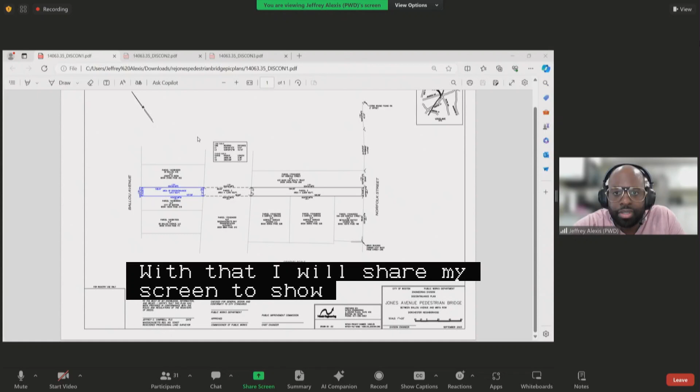Public Works is also in coordination with the Mayor's Department of Housing to transfer parcels that we own, parcels 1 and 3, to them for future development. With that, I will share my screen just to show you all the PIC plans.

Just zooming in quickly, showing these 3 parcels, the areas of discontinuance. This is the first PIC plan. It shows parcel 1, as you see here, which is adjacent to a City of Boston parcel, but this will be also owned by the Public Works, City of Boston.

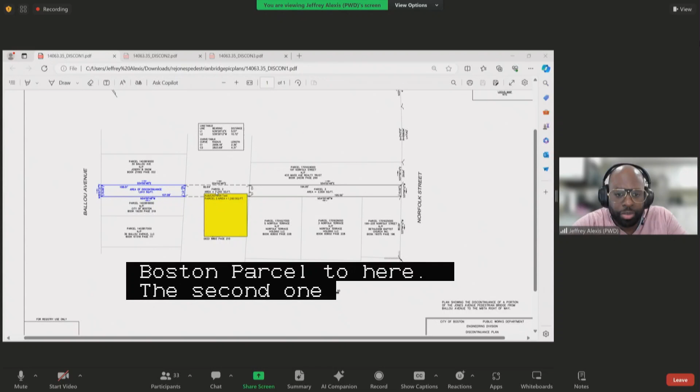Parcel 2 here, which would be owned by the MBTA, and parcel 3 here, which is also owned by Public Works, which these 2 we are proposing to transfer and work and coordinate with the Mayor's Housing Department in order to transfer those parcels to them.

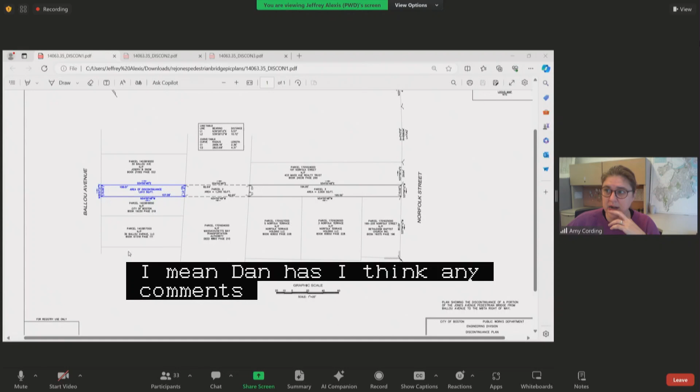With that, I don't know if I would turn it over to my colleague Dan Murphy. I don't know if he has anything to say on this end, but with that, I'll turn it back to you, Chairwoman. Assuming Dan has nothing, any comments or questions by commission members, PIC staff, or public? I will use this opportunity to remind the public, if you wish to ask questions or add testimony, please use the raised hand function at the bottom of your screen. I see none at this time.

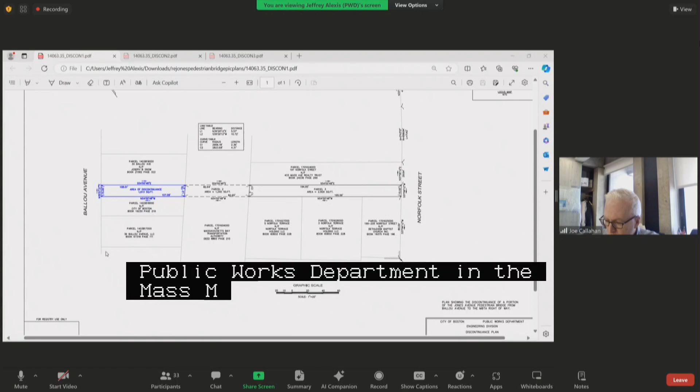I will entertain a motion on public hearing item number 1. I make a motion to approve a joint petition by the City of Boston Public Works Department and the Massachusetts Bay Transportation Authority for the discontinuance of any and all rights to travel the public may have in the area of Jones Avenue Footway, as further read into the record by the chair. Second. All in favor? Aye.

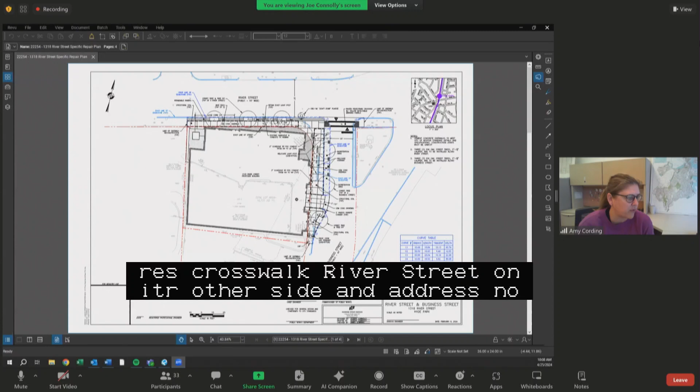Public hearing item number 2 on a petition by HB Trax Realty LLC for the making of specific repairs within the following public ways in Hyde Park, consisting of curb realignment, roadway and sidewalk reconstruction with structural soil, as well as new and relocated pedestrian ramps, specialty pavement, street lighting infrastructure, street trees, green stormwater infrastructure, storm drain infrastructure, bike racks, hydrants, driveway curb cuts, and raised crosswalk. River Street on the southerly side at address number 1318, generally west of Business Street south of River Street. New business 4/11/2024 is shown on a set of plans entitled City of Boston Public Works Department Engineering Division Specific Repair Plan, River Street, Business Street, 1318 River Street, Hyde Park, dated February 8th, 2024.

Good morning, Chairwoman, Chief Staff, thank you for the introduction. Joe Connolly of Howard Stein Hudson, civil engineer for the project, representing HB Trax Realty LLC. I am joined today by James Downing, Ian McKinnon of Howard Stein Hudson, the proponent Bobby Patel, and the project attorney John Porcini as spectators.

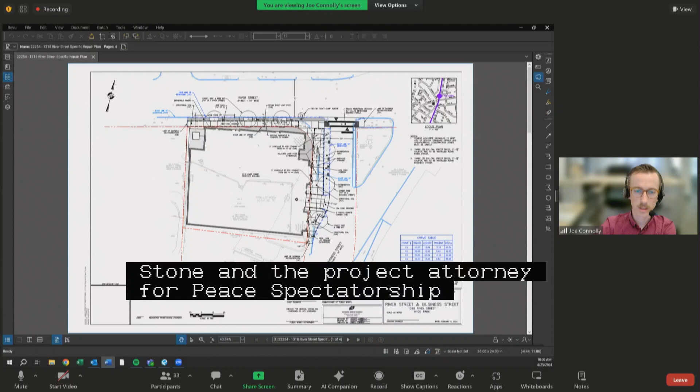We are petitioning for repairs related to our project at 1318 River Street in Boston's Hyde Park neighborhood. There have been no changes made to the plans since we last met for our second distance hearing. All comments were resolved prior to that. I'm happy to run through any of the improvements again or answer any questions. We have recently submitted hard copies of Boston Water and Sewer documents and are currently awaiting our site plan approval.

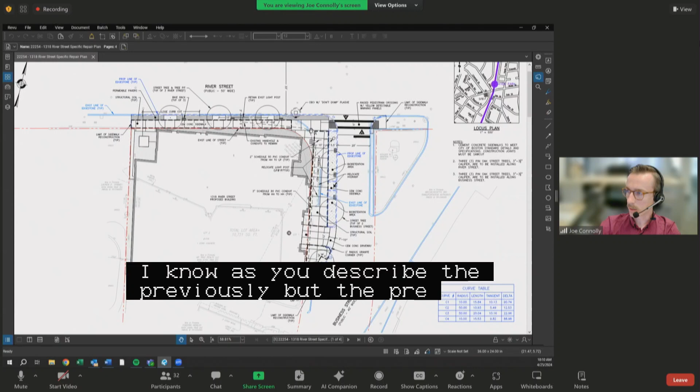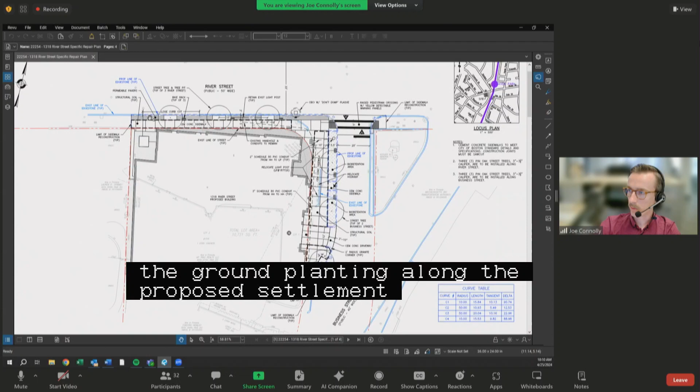I know I've described most of the improvements previously, but just a quick summation. We're closing this curb cut on River Street, closing the curb cut on the corner of River and Business Street, modifying the curb cut on River Street to be used for the garage parking below the proposed development, sidewalk reconstruction along the entire frontage, permeable pavers on River Street, bioretention areas in the furnishing zone along Business Street, three street trees proposed along each frontage, a raised pedestrian crossing across the Business Street intersection, one new street light, as well as one relocated street light.

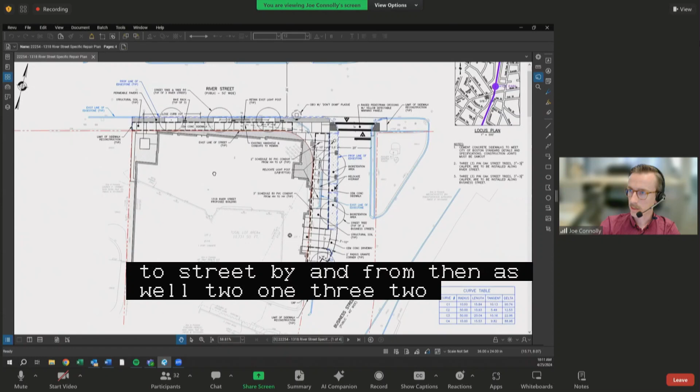I think that just covers it. Does anyone have any questions? Questions or comments by commission members? PIC staff or public? I'm going to pause now to see if anybody from the public would like to add testimony or ask questions. Seeing and hearing none, I think we're all set.

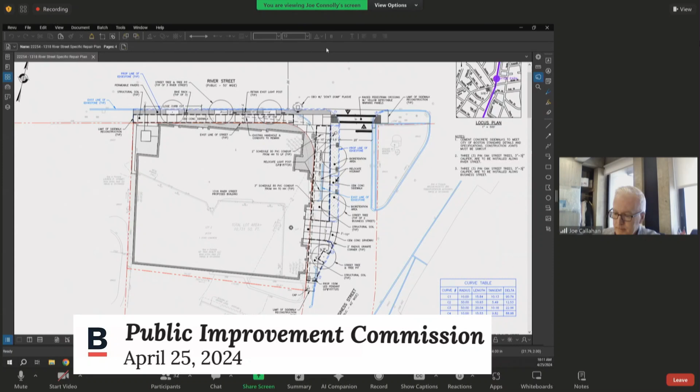All right, I will entertain a motion on public hearing item number 2. I make a motion to approve a petition by HB Trax Realty LLC for the making of specific repairs in the area of River Street and Business Street as further read into the record by the chair. Second. All in favor? Aye. Great, thank you.

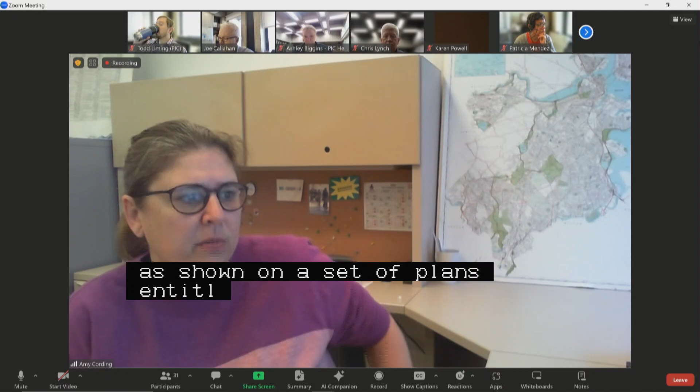On to public hearing item number 3, on a petition by Arnold Arboretum of Harvard University for the making of specific repairs within the following public ways in West Roxbury, consisting of curb and sidewalk reconstruction, as well as new and relocated pedestrian ramps, specialty pavement, street lighting infrastructure, landscaping, storm drain infrastructure, and bollards. Bussey Street generally at Walter Street and South Street, Walter Street generally at Bussey Street, and South Street generally at Bussey Street. New business 4/11/2024 is shown on a set of plans entitled City of Boston Public Works Department Engineering Division Specific Repair Plans, 125 Arborway, Walter Street, and Bussey Street, and South Street to be opened, 4 sheets dated April 2024.

Good morning, Chairwoman and PIC staff. Thank you for hearing us today. My name is Danny Schissler. I serve as Head of Operations and Project Management at the Arnold Arboretum. I'm here on behalf of the Arboretum to present this project, which proposes improvements to two of our historic entrances, one at the intersection of Walter and Bussey Street, and one at the intersection of South and Bussey Street.

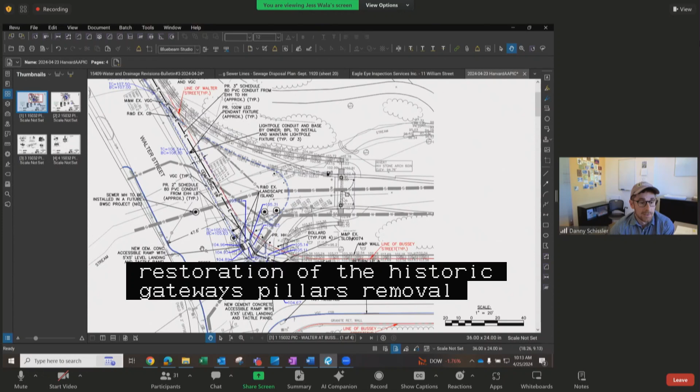The improvements comprise restoration of the historic gateways, pillars, and stone walls, removal of impervious surface and the addition of planting beds, new signage, and hardscape treatment, bollards, and within the right-of-way, reconstruction of sidewalks, pedestrian ramps, the addition of street lighting in collaboration with the Street Lighting Division. Since we last presented, there have not been any changes to the plans besides noting some points regarding reciprocal ramps, for which we are seeking a MAAB variance. If that variance is not received, the Arboretum is committed to reconstructing those ramps.

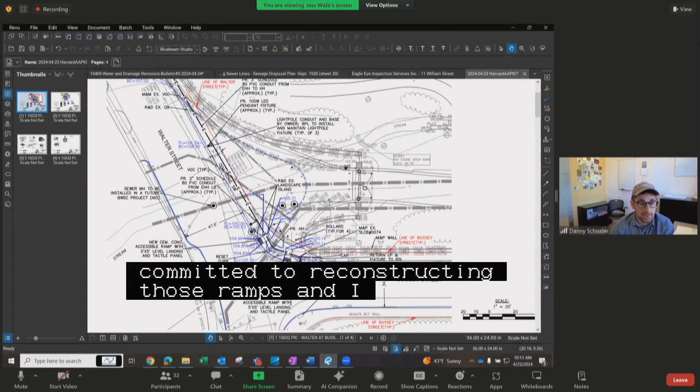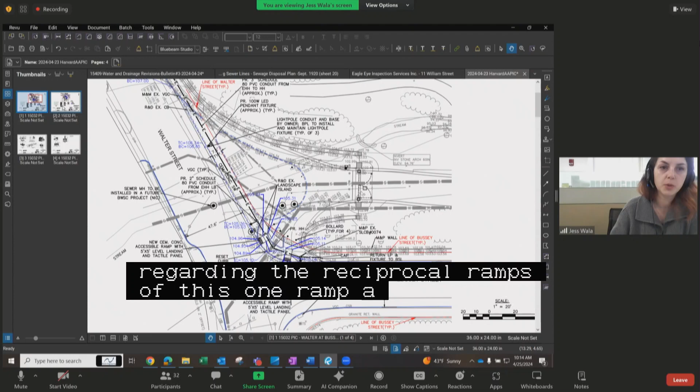And I will turn things over to Jess Wala, Nitsch Engineering, our civil engineer for the project. Thank you, Danny. Thank you, commissioners. So yeah, Danny, you basically summarized everything. We had coordinated all comments previously, and the one outstanding comment was regarding the reciprocal ramp. So this one ramp at Walter across Bussey Street, which had some slightly non-compliant slopes, and then the reciprocal ramp across Bussey Street at Poplar Gate. So the team submitted the variance, I believe last week, and are waiting for the hearing. And if that is not granted, then these, as Dan described, will be reconstructed. All other items, I believe, have been settled. We've coordinated with Boston Water and Sewer, street lighting, and all other agencies. So I think those were the only outstanding comments regarding ramps.

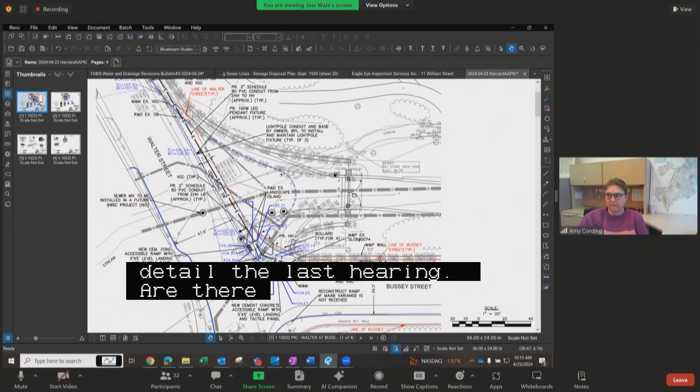Is there anything that I should speak to? I know we went into this pretty detailed at the last hearing. Are there questions or comments by commission members, or anything additional you'd like to see? PIC staff or public? Do you have any idea on the timeline for that variance application?

It was submitted on Friday. Jess or Suran, do you have any sense of when the hearing for that would be? That would be May, I think it's on the May 6th agenda. Great, thank you. Can you just make that decision and update the plans as necessary before submitting Mylar, if that's all right with you? Yep, that makes sense. Thank you.

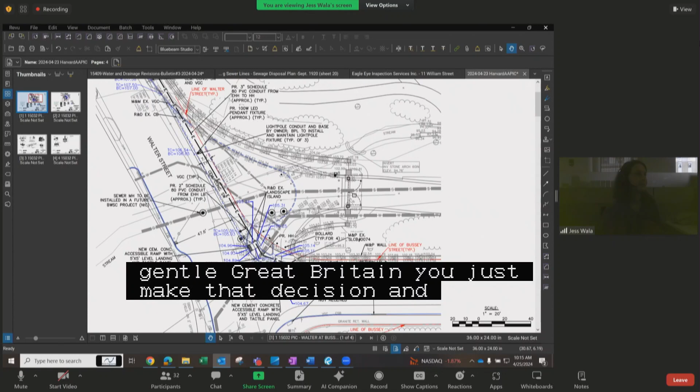All right, with that, I'll entertain a motion on public hearing item number 3. Make a motion to approve a petition by Arnold Arboretum of Harvard University for the making of specific repairs in the area of Bussey, Walter, and South Streets, as further read into the record by the chair. Second. All in favor? Aye.

Good morning, Bill Conway, Axis Engineering, representing Marathon Fiber. We're proposing to intercept the existing level 3 duct bank at the intersection of Bedford Street and Kingston Street, and installing approximately 520 feet of 6 4-inch conduits, 1 for city shadow, to the existing level 3 manhole on Chauncey Street that feeds 1 Summer Street. We'll also be adding 2 4x4 manholes to support the project.

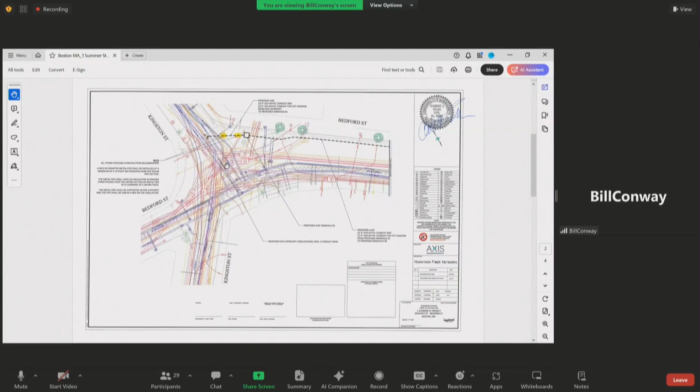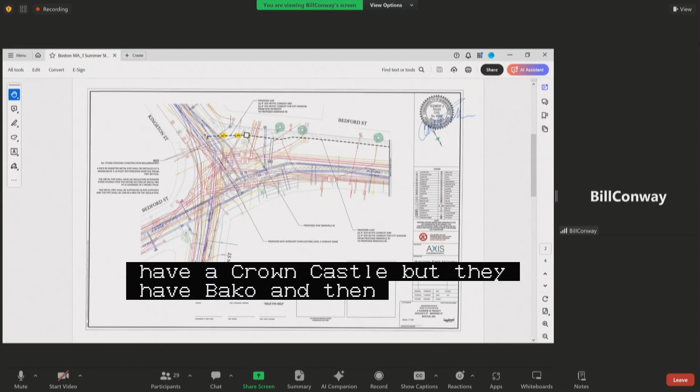We also have 4 joint trench participants, including AT&T, LightPath, RCN, Zayo. We did have Crown Castle, but they have backed out. And then, pending, we had notification from ForwardX Communications that they are interested in joining in on this joint trench as well.

Any questions or concerns? Questions or comments by commission members? PIC staff or public? I think we're all set on this.

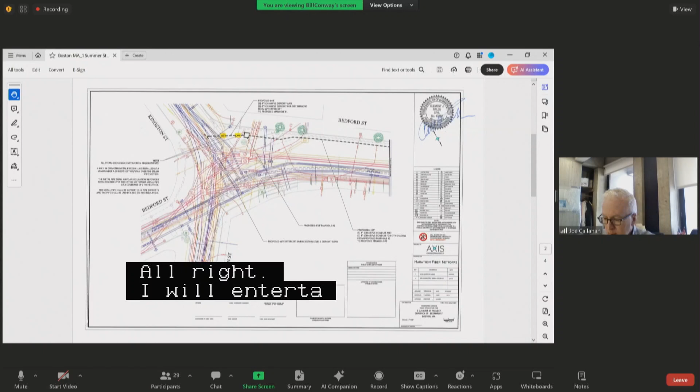All right, I will entertain a motion on public hearing item number 4. Motion to approve a petition by Marathon Fiber Networks LLC for a grant of location in the area of Bedford Street and Chauncey Street as further read into the record by the chair. Second. All in favor? Aye. Thank you.

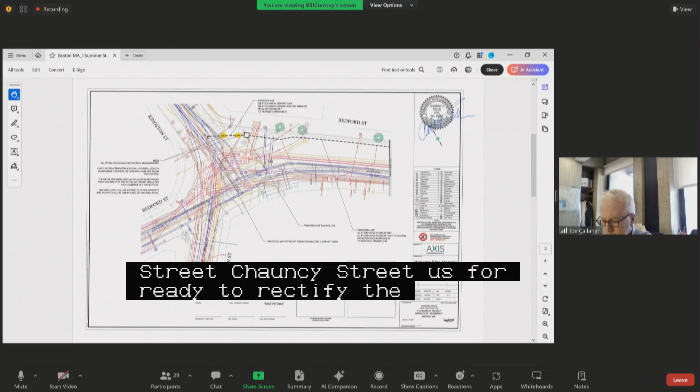All right, that concludes public hearings. New business. New business item number 1, 47 to 55 LaGrange Street, Tamworth Street, Tremont Street, Boylston Street, Boston proper, pedestrian easement specific repairs on a set of petitions by FPG LaGrange Owner 1 LLC.

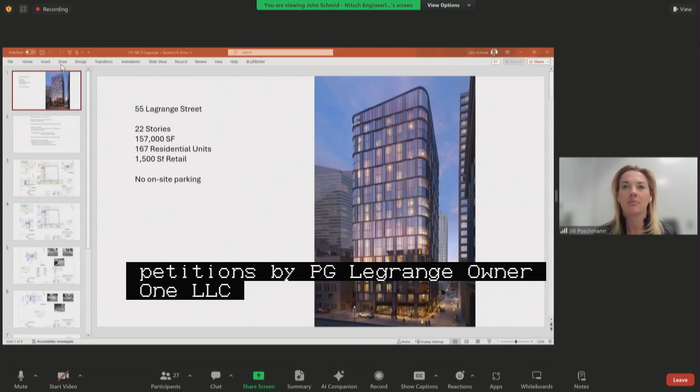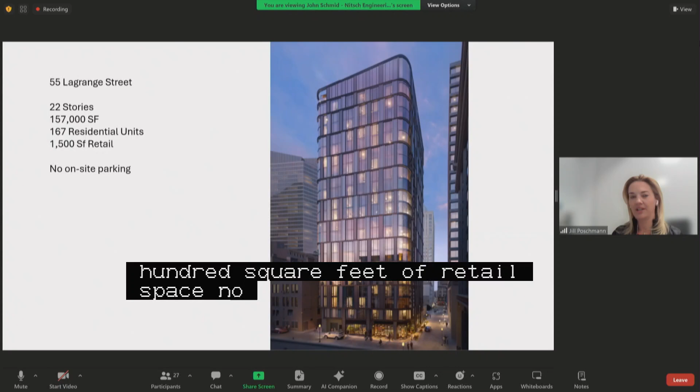Good morning, my name is Jill Poschmann. I am very happy to be here this morning representing my client, FPG LaGrange Owner 1, who is the developer for the project located at 55 LaGrange Street. This is a 22-story multifamily building with 167 condo units and 1,500 square feet of retail space, no on-site parking. I'm here today with our civil engineer on the project, John Schmid with Nitsch Engineering, to further explain what we're here for: pedestrian easement and specific repairs.

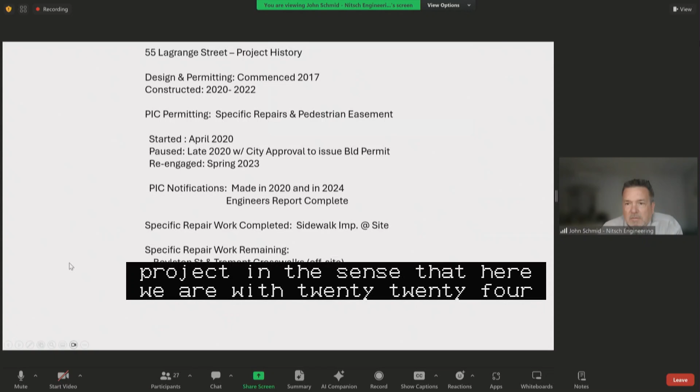Thank you, Jill. Good morning, Commissioner. Again, this is John Schmid with Nitsch Engineering. This is an unusual project in the sense that here we are in 2024 seeking PIC approval for a project that was substantially completed in 2022. So for a little bit of history, design and permitting for this project started back in 2017. Construction was from 2020 to 2022. We started the PIC process in 2020.

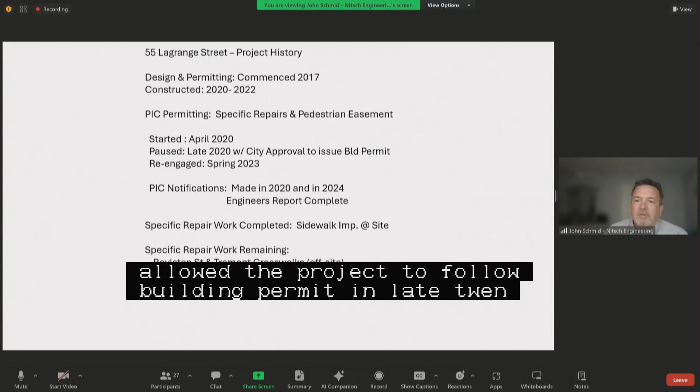And then in late 2020, we got bogged down in the PIC process because there's a lot of conversation between ownership and the city about off-site improvements and mitigations. For reasons I wasn't part of, the city allowed the project to pull a building permit in late 2020 with the understanding that they could not receive their permanent certificate of occupancy until the PIC approvals are completed, as well as the work associated with that. So we were re-engaged back in 2023, and we met with Todd probably late last year, redid the notifications, completed the engineer's report, and here we are today.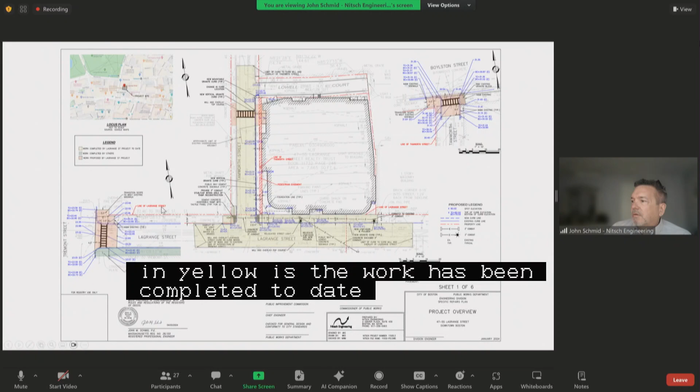The next drawing will show the work that's been completed to date and the work that still remains. So in yellow is the work that's been completed to date, and that was completed with the building project itself. The peach at the intersections here at LaGrange and Tremont and Boylston at Tamworth is work that was part of the off-site improvements that were part of the negotiation, and these are 2 tabletop crosswalks that have been designed per the city's request. And then this little green section here was part of the original ask, but the abutter to this project performed this work over the last couple of years.

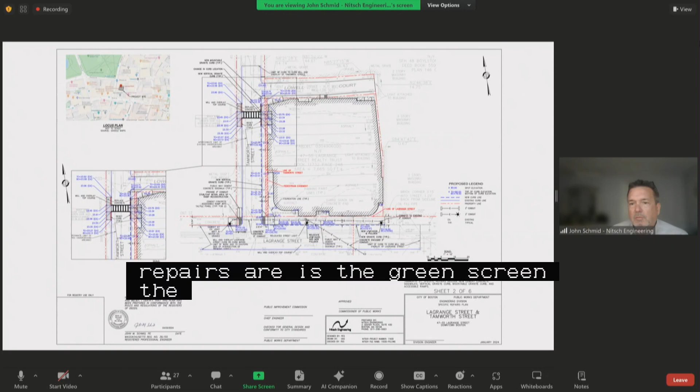To dig into the weeds of what the specific repairs are: LaGrange Street has been reconstructed. LaGrange Street sidewalk has been reconstructed with a 6.5-foot concrete sidewalk. We have 2 new streetlights. We are still obligated to provide an additional streetlight, and this is coordination I've done recently with Boston Streetlight.

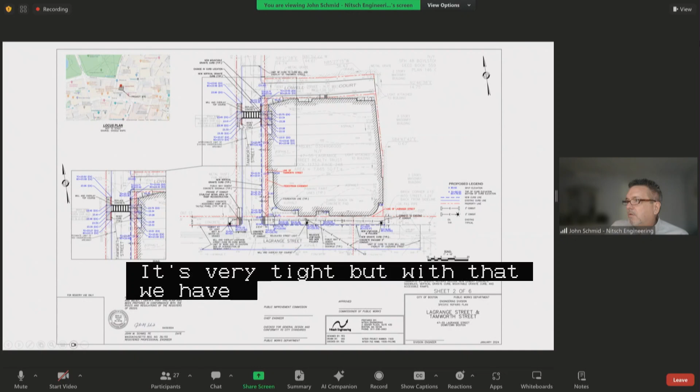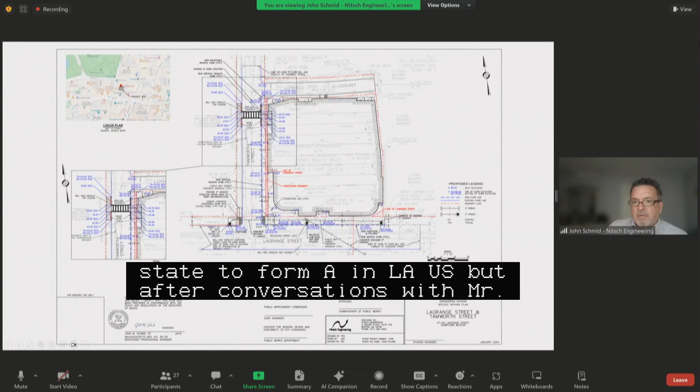The reason we cannot continue north on Lowell is because we don't have adequate space here, as well as Lowell Court is a private way, and this land is privately owned. At the request of the city, we did apply for a variance to the state for a mid-block crosswalk, but after conversations with Mr. Joyce, he told us the variance wasn't warranted because we don't have access to this anyway. So we withdrew that variance and shared that information with the city, and are proceeding with a commitment to providing a mid-block crosswalk to allow pedestrian access, a place to go once they reach here, they can cross and go north.

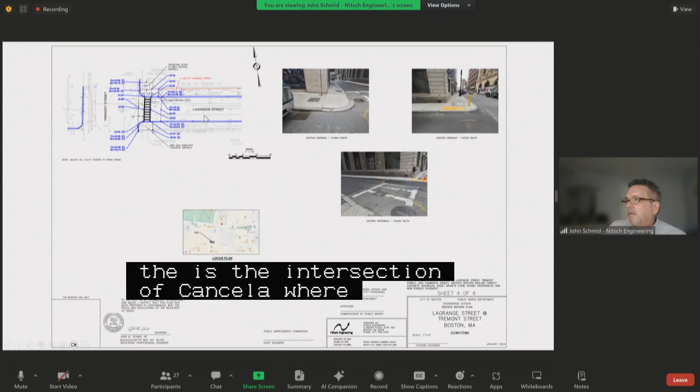The next is the intersection of Tamworth, where we have the flush sidewalk, flush crosswalk at the intersection. LaGrange at Tremont, flush crosswalk at the intersection.

And then here is the drawing for the pedestrian easements. That's about 1.8 feet wide, that runs down into it. That's the project in a nutshell. Happy to entertain any questions.

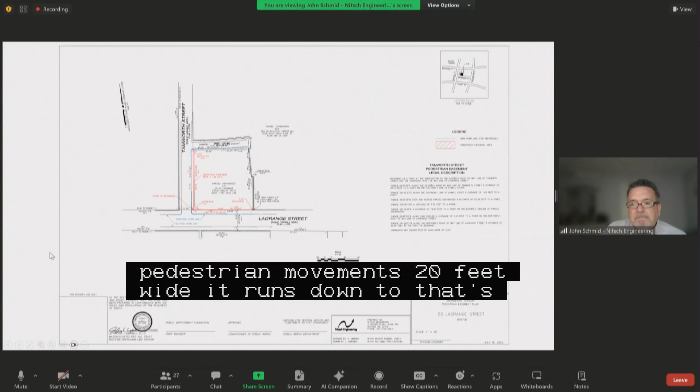Questions or comments by commission members? That's right, I thought the comment was no on-site parking. Is there parking designated somewhere else nearby? Yeah, in the agreement, I understand that parking is being provided at the building across the street. Yeah, the Ava, which is located directly across the street, has sufficient parking, and that's where most residents have chosen to rent space.

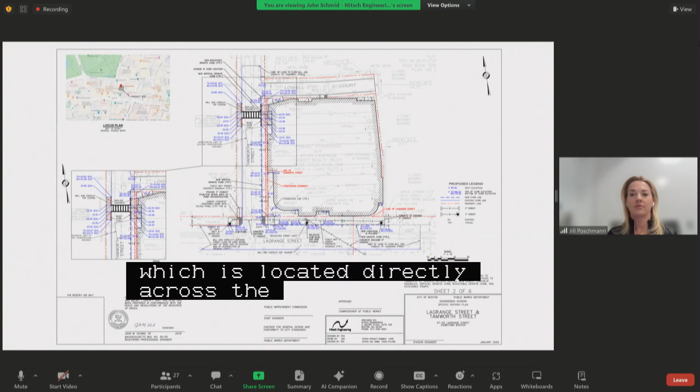Additional comments from commission members? PIC staff or public? All set, I think.

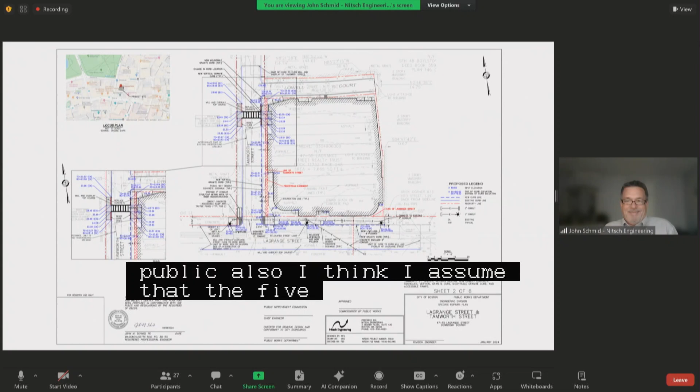All right, I assume that the 5 years plus 2 weeks will be enough time? I certainly hope so, we'll do our best. All right, well, we'll see you in 2 weeks for the exciting conclusion. Thank you. Thanks. Bye-bye.

New business item number 2, 190 Dudley Street, Roxbury, specific repairs on a petition by Arena Enterprises, Inc.

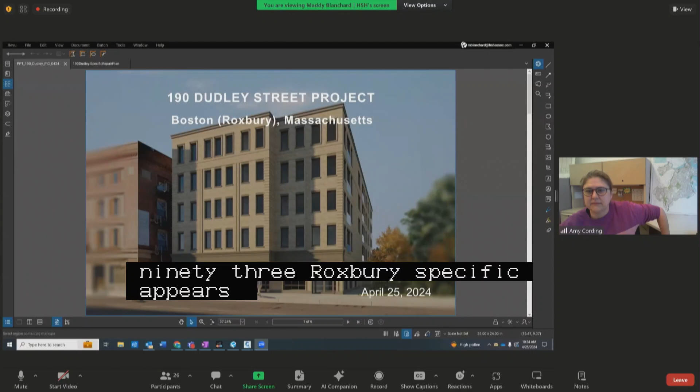Madam Chair and Commission members, I am Maddie Blanchard with Howard Stein Hudson. We're the civil engineer performing the PIC permitting work for the project here at 190 Dudley Street. I am joined today by members of Arena Enterprises, the developer, and Presco Associates, the project architect.

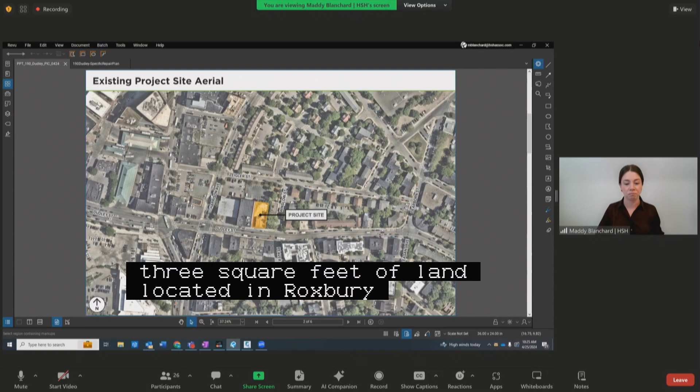The project site consists of 2 parcels today, totaling 8,743 square feet of land located in Roxbury. The project site is located on the north side of Dudley Street between Harrison Avenue and Winslow Street. The existing site today is occupied by a 1-story commercial building, bordered by a mixed-use building on the west and a park to the east.

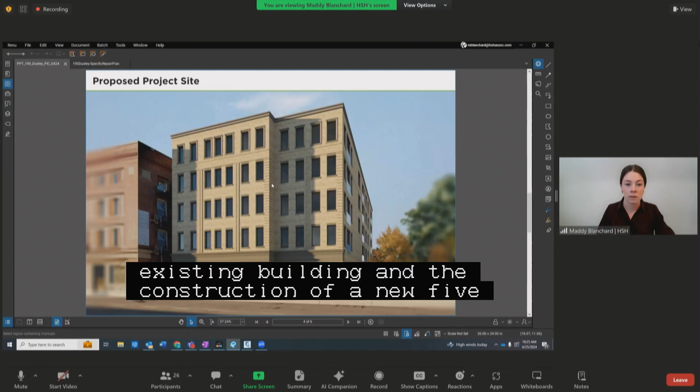The proposed project consists of the demolition of the existing building and the construction of a new 5-story mixed-use building totaling 32,540 gross square feet. The first floor of the development will consist of commercial space and a bike room, and floors 2 through 5 will contain 28 residential units.

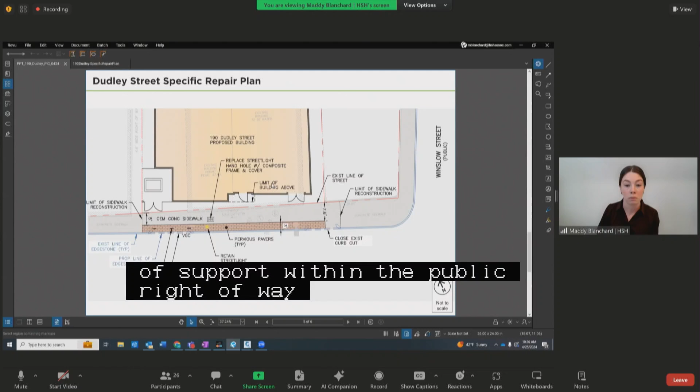The proposed project consists of some work within the public right-of-way of Dudley Street. This work consists of closing 2 driveway curb cuts, the installation of a 3-foot-wide furnishing zone that consists of permeable pavers, and maintaining a minimum 5-foot-wide continuous sidewalk. There's no changes to any of the Boston water and sewer infrastructure within the right-of-way or the street lighting within the right-of-way adjacent to the project site. And with that, I will open it up to any questions or comments.

Questions or comments by commission members? PIC staff or public? The project is in a very good place with all of the agency coordination. I believe there may be some minor comments from the BPDA that will need to be addressed in the next 2 weeks, but we expect that should be plenty of time to finish that up.

Certainly, all right, so we'll see you in 2 weeks. Sounds good. Thank you. All right.

New business item number 3, 128 Tremont Street, Boston proper, vertical discontinuance, specific repairs on a set of petitions by Holocaust Legacy Foundation.

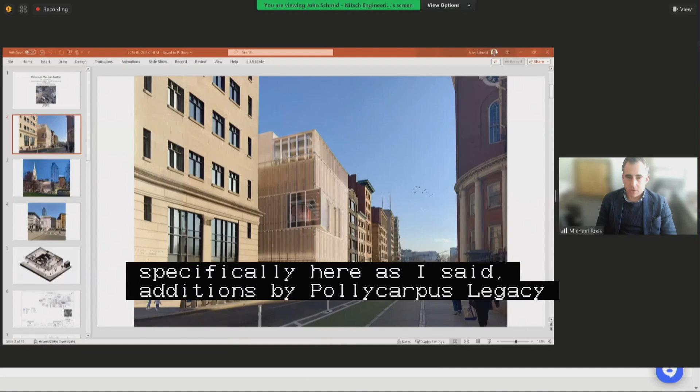Good morning, Madam Chair, Commissioners, and staff. My name is Mike Ross. I'm an attorney for the Holocaust Legacy Foundation. These are the nonprofit owners of this property. Team that will be working with our general contractor, Kennedy, to get this Holocaust Museum built. I'm here with John Schmid of Nitsch Engineering, who will be turning this over. I'll turn this over to him in 1 second.

We're here on specific repairs relating to security bollards for the safety of the property and visitors. That will be shown to you in a minute, on the sidewalk in front of the building, as well as a vertical discontinuance of this protruding bay on the front of the building on Tremont Street, as well as a screen facade that you'll see in a moment. We're in the process of getting that appraised, and we'll also be seeking exemption for payment of that discontinuance for this nonprofit. I'll also note that we're working on an administrative item with staff for the areaway.

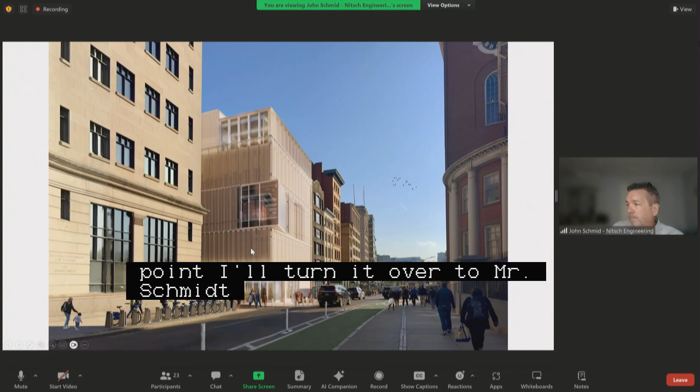At this point, I'll turn it over to Mr. Schmid of Nitsch Engineering. Thank you, Michael. So here are some renderings that will help describe some of the things Michael just mentioned. This is the proposed building here. This is one of the discontinuances, which is a window bay that projects at the corner of Hamilton and Tremont. And then you can see the wire mesh finishes along the base of the building. Here's another view from the common.

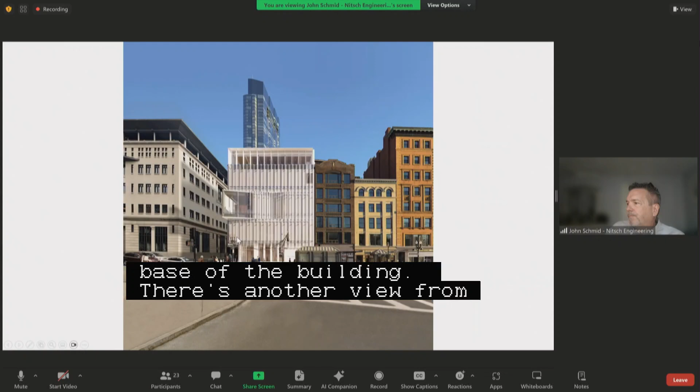Here's another view from across the street, and here's a nice plan rendering. This shows the sidewalk improvements here, this is the existing head house, and these are the bollards that we are proposing.

We'll also get into the curb cut here on Hamilton for deliveries. It's only 7 foot wide, so it's for window deliveries in parking.

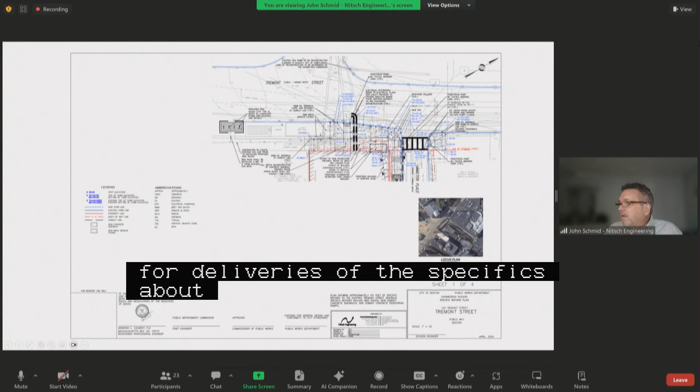The specifics of Tremont Street improvements: the concrete sidewalk ranges in width between 9.2 and 22 feet. We are adjusting the curb line at the intersection here, but we still have a couple of loose ends with this project that we'll be addressing in the next 2 weeks.

One of those has to do with the actual locations of the bollards, and we hope to meet with facilities as well as Public Works to confirm and come to agreement on that exact location.

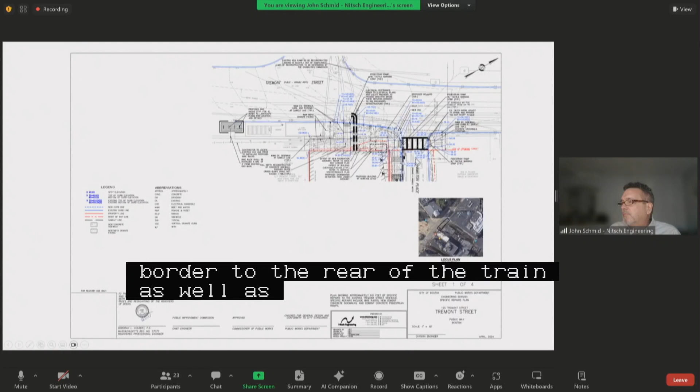We also need to revisit this curved corner a little bit here because our abutter to the rear of Hamilton has very large delivery vehicles, 67-foot tractor trailers that come in, and this turning movement as presently designed doesn't work. So we need to take a look at this and possibly move the curb back to its current location. But these are things we're working on in these 2 weeks.

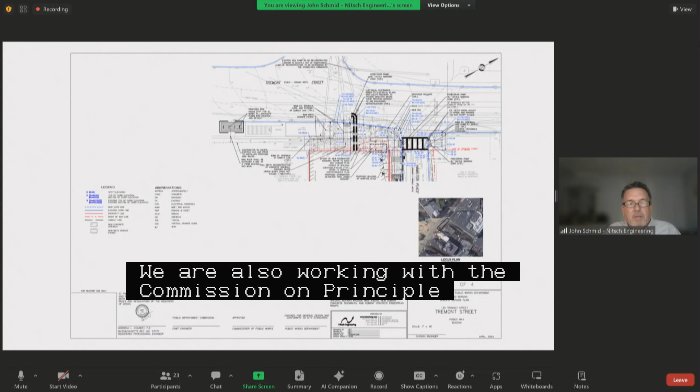Again, Tremont sidewalk varies between 9 to 22 feet wide. We are also working with the Disabilities Commission on reciprocal ramps and the extent of those improvements. We have a question out to Sarah, but I'll be out of the office for a little while, so we'll have to work these out with Patricia. We also provide bike racks off-site right here.

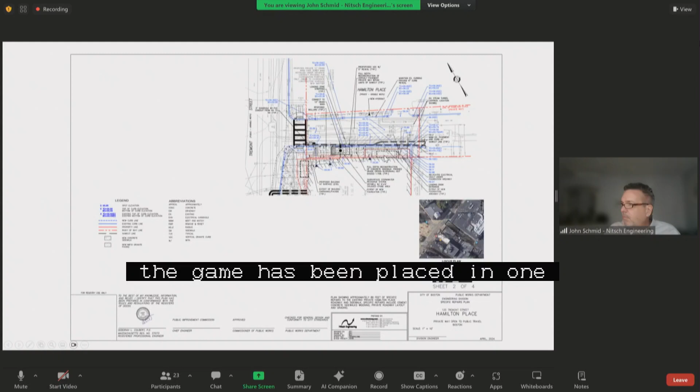On Hamilton Place, which is a private way, we have a 9 foot wide sidewalk. Again, we have a 7 foot loading ramp right here, and we have a below-grade recharge system right here. There's also an existing areaway that Michael mentioned earlier that we are in the process of providing a license agreement for, understanding that's an administrative process.

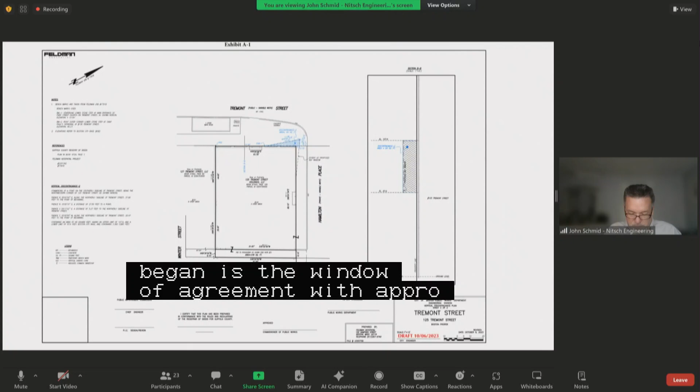That projects into the public way about 1.8 feet. It's about 16 feet above the sidewalk, and that's all about 114 square feet.

Yeah, that's the extent of the improvements that we're proposing. Any questions?

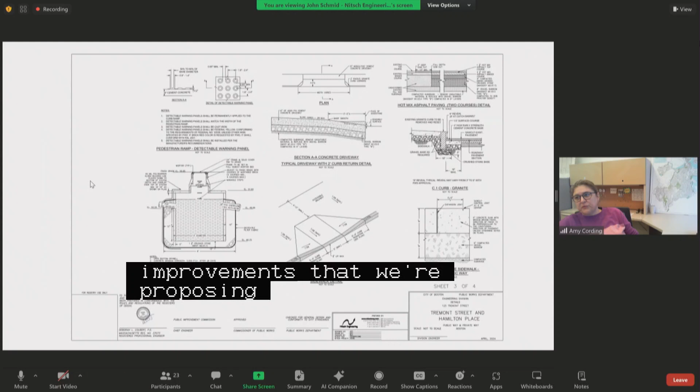I'll start with, you probably noticed our signal equipment out front doesn't match the facade of this new building, as we have, I think, a direct overhead feed that goes from the cabinet to a signal.

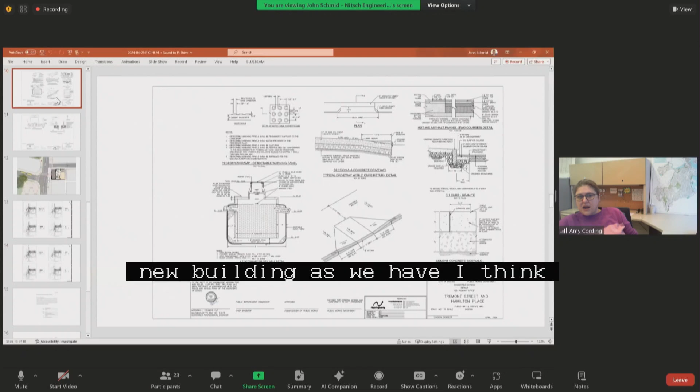If you look out there, it's pretty ugly right now. You can see it in that picture. We have a cabinet that's in the middle of the sidewalk, and then we've lost the below-grade connection, and it's fed directly overhead from the cabinet into the signal.

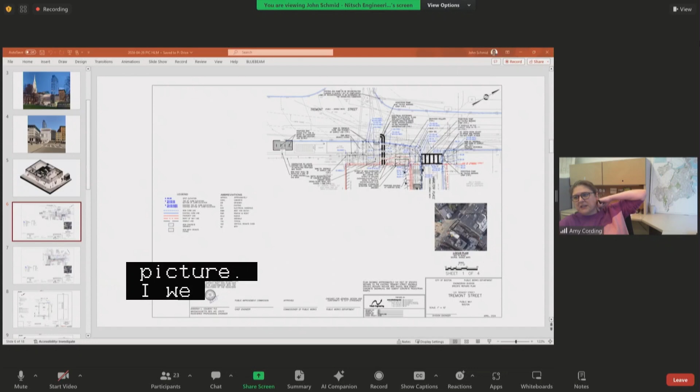In the next 2 weeks, come talk with me and Signals and see if we can improve that. I'm not going to ask for anything super expensive here, but maybe we can get that looking better. Especially if you have the sidewalk ripped up, maybe we could at least get the connection between the two back underground. In a perfect world, the cabinet would move because it's in a terrible spot at the entrance, but that might be a little bit more complicated.

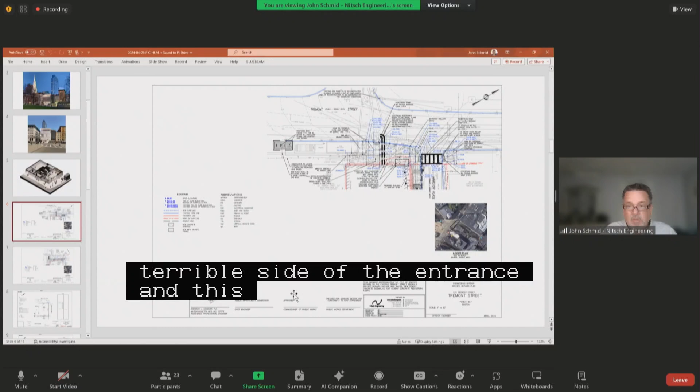Okay. Yep, so we will meet with you about the traffic signals and find a resolution. Yeah, it's Wilson, right, that we're really going to need for this one, because I think we're going to have to get a little creative. Okay. Yeah, the project requires some creativity.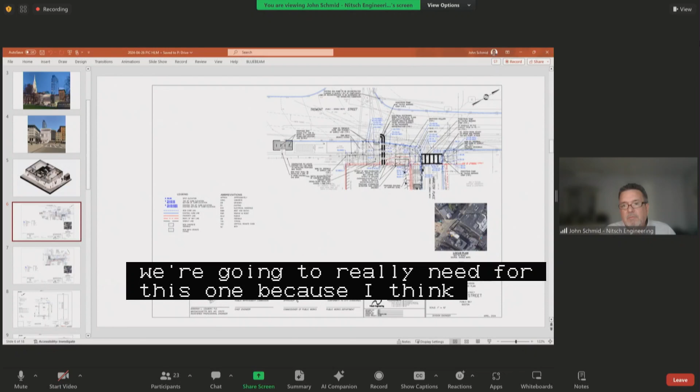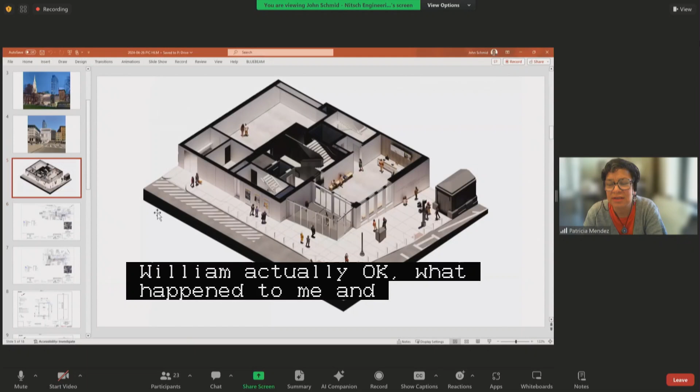And the concern that we have is also basically about the design of the building too, because we think it's a great project. It looks beautiful in the rendering.

We're very excited about the building, but we're still concerned about having the bollards in the public right of way, trying to protect the building, but the building itself has a glass facade that looks pretty vulnerable. So we would like to discuss considering putting something more sturdy instead of the glass, so we don't have to have the bollards outside. We would love to have more conversations with the design team.

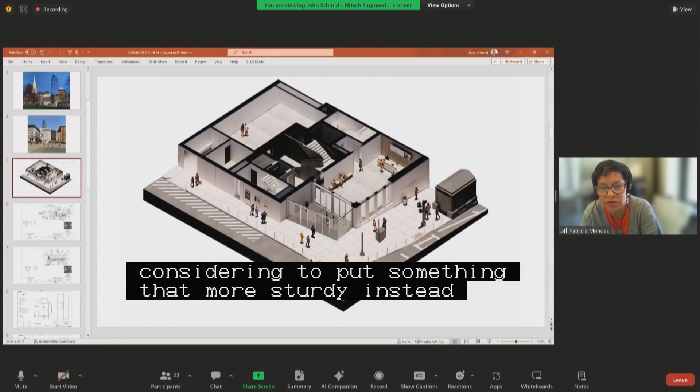Okay, I'll reach out to you and try to set up a meeting for next week. Perfect, thank you so much, John.

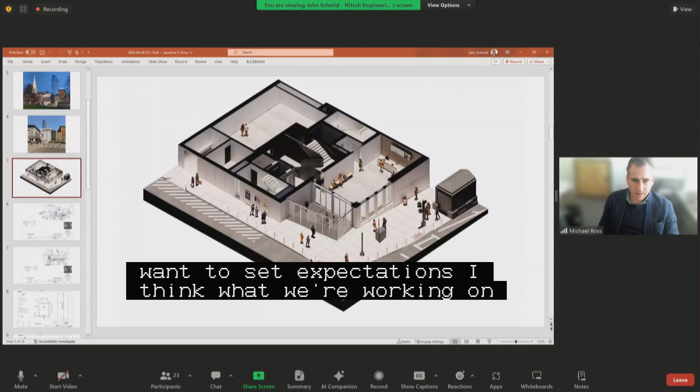Thank you. I just want to set expectations. I think what we're working on here is to make sure that the bollards meet accessible guidelines at the crosswalks and anywhere the public might go. So we've expanded it to 5 feet to provide that access, which I know is the minimum, but that's just the bollard. We've seen examples across the city of very sensitive sites that need that security. But I don't think changing the facade and materials of this building is a likely thing we're going to do. I just want to be transparent - I don't want to say yes here at the PIC and then say no privately. I just think we'll work with you. We'll do everything we can to make this building accessible.

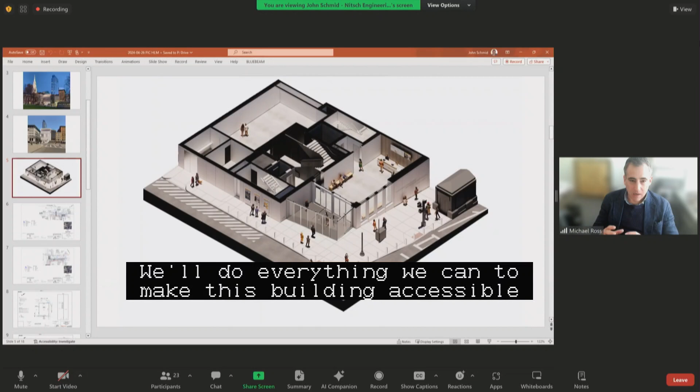It is very accessible. There's a separate experience within the building so that if you're in a wheelchair, you get the exact same kind of immersive experience - not exact, but pretty much almost exactly the same as someone walking through the building, really taking those steps, working with the commission on that. But I think for the bollards, those are going to have to stay there. We can work with where they're placed, and we're creating these 5-foot openings, but I just wanted to say that.

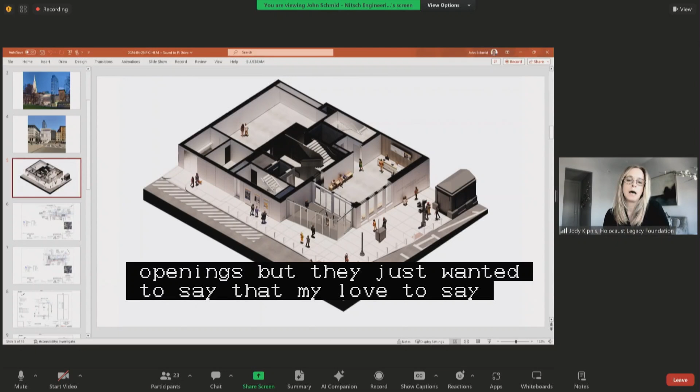Am I allowed to say something as the owner? I just want to touch on what Mike said. The reason for the bollards is not so much to protect the building, but my biggest concern is protecting the pedestrians and the public who will be walking by, even the ones who are not coming to our building, who are just coming out of that train station and going to work. So for me, the bollards are really to protect.

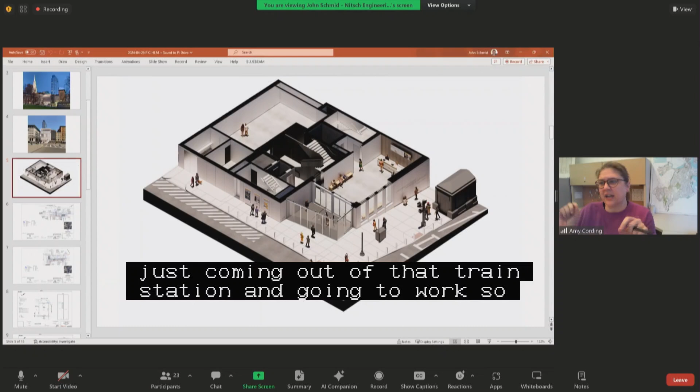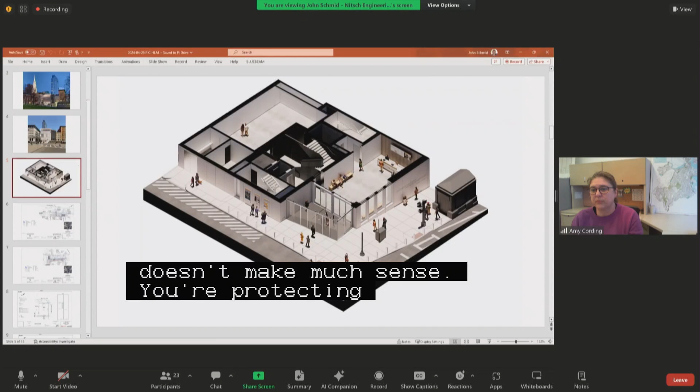Yeah, I think that's kind of an issue for us because our intention is not to have bollards protecting pedestrians along all public right-of-ways. A bollard is something we go to if there's something specific that keeps getting hit, or is likely in a weird spot, but it's not our intention to just add bollards at every curb line for that reason. So if there's a reason here that we want to protect, maybe we can limit this to just the corner - having bollards in front of a traffic signal doesn't make much sense. You're protecting the traffic signal, not a pedestrian, right? And we have streetlights and other equipment, so maybe if they were just on the corner, where you might find yourself accidentally - but there's a lot of cases where we're creating weird things people have to walk around that aren't really protecting anybody.

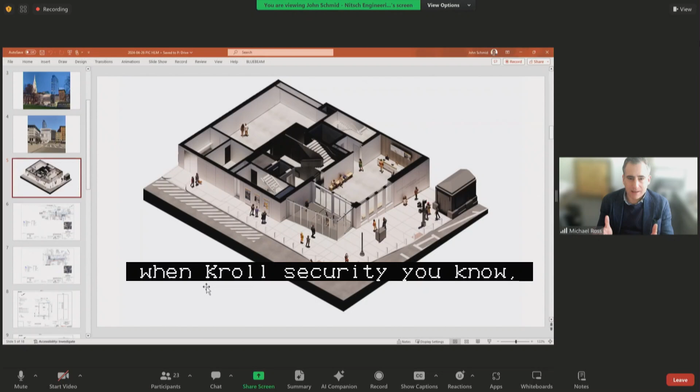No, I think thank you for that explanation. Sure, the purpose of the bollards is because of this - we're working with Kroll Security. Kroll Security is involved because of the site, what's inside, the sensitivity, the fact that it's a target - the Holocaust Museum, unfortunately, in this world and day and age. So we're worried, like Jody said, that.

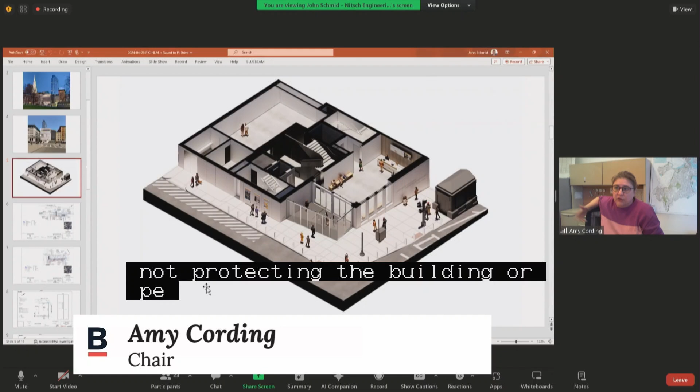Yeah, no, I hear you. I just think there are some spots where we're putting bollards where they're not protecting the building or people, because there's other stuff there. So if we maybe just limit those, there will be fewer and you'll have the same level of protection. I see what you're saying. Okay, good point, thank you. That's right.

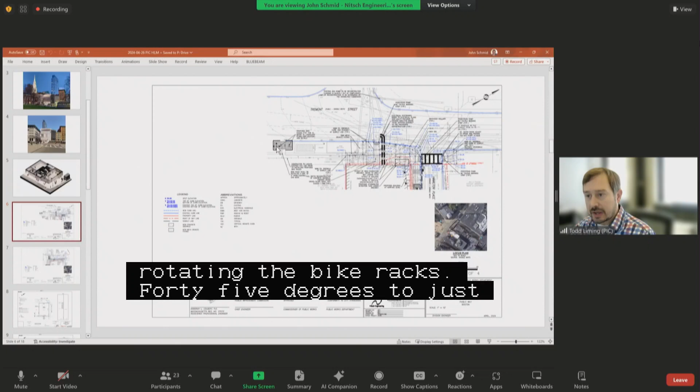Any other questions by commissioners, PIC staff, or public? I did have one request to have the project explore potentially rotating the proposed bike racks 45 degrees to get the bikes a little less in the way of the sidewalk, understanding there's a head house and some other infrastructure right there. So if you could take a look at that in the next 2 weeks.

And then to summarize everything that has been said here, it sounds like final coordination with BTD, with the Commission for Persons with Disabilities, and with the BPDA all need to be finalized in the next 2 weeks as well, so hopefully we can get that done before the public hearing.

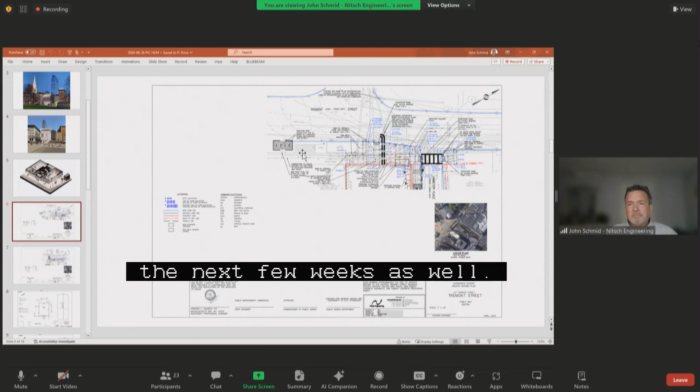We hope so too. We'll see you. All right, see you guys in 2 weeks. Thank you very much.